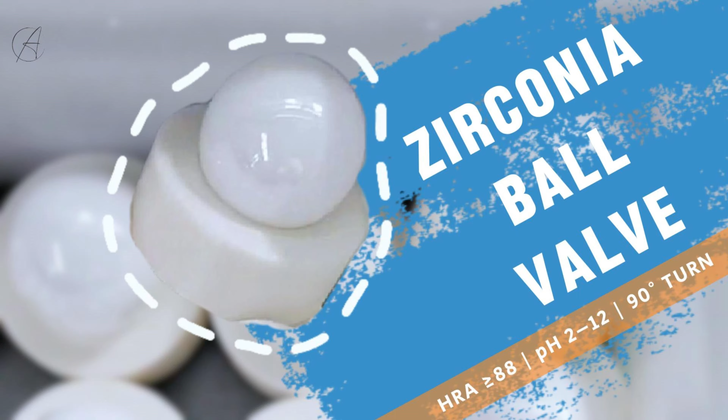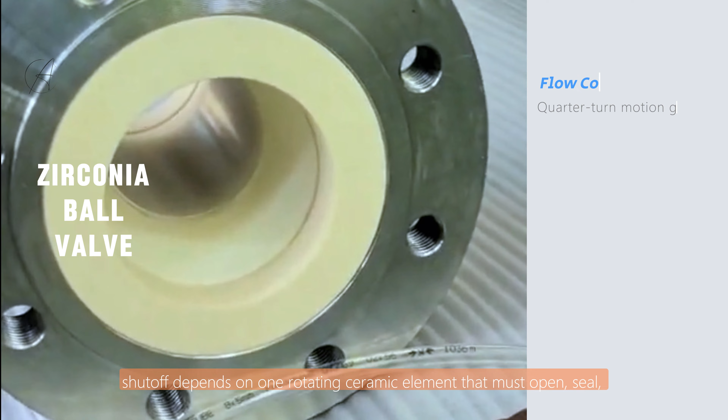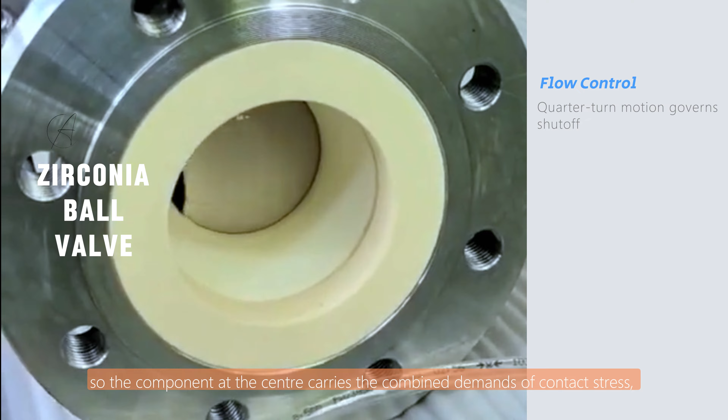Inside a ball valve, shutoff depends on one rotating ceramic element that must open, seal, and reopen without losing geometry. Each quarter turn redirects the flow path, so the component at the center carries the combined demands of contact stress, fluid attack, and repeated motion.

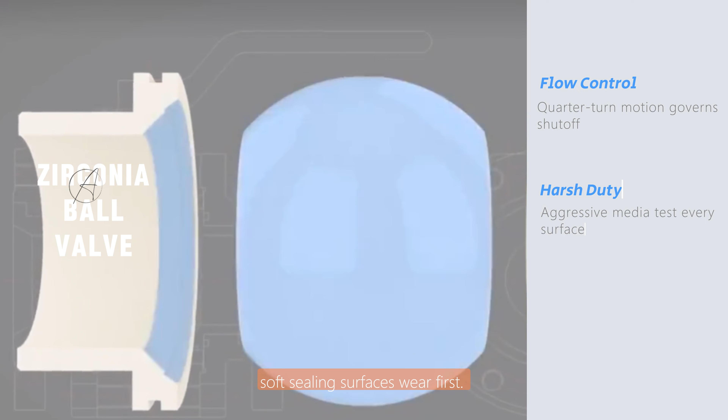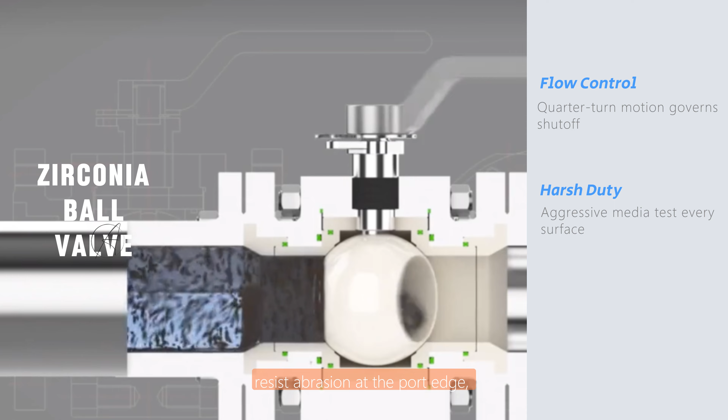When slurries contain hard particles or corrosive species, soft sealing surfaces wear first. The ball and its matching ceramic partners are then asked to do more than block flow. They must keep the passage smooth, resist abrasion at the port edge, and maintain stable contact at the sealing zone.

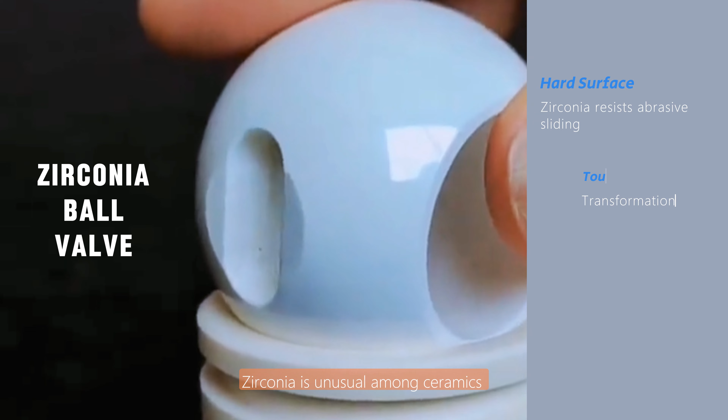Zirconia is unusual among ceramics because stress can trigger a local crystal transformation near a crack tip. That volume change helps shield the crack and raises fracture toughness compared with many oxide ceramics. The result is a material better able to tolerate contact damage and interrupted loading in mechanical sealing parts.

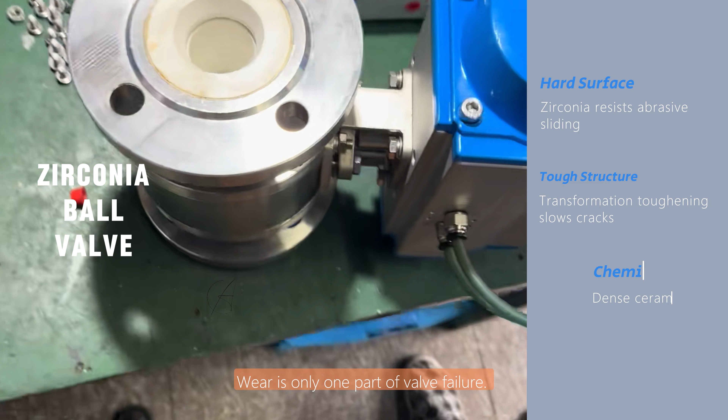Wear is only one part of valve failure. Corrosion, surface reaction, and deposit buildup can also disturb sealing. Dense zirconia offers broad chemical resistance and does not rust, which helps preserve surface integrity in many aqueous and chemically active streams. Medium composition, temperature, and pH still need review because compatibility is always service-specific.

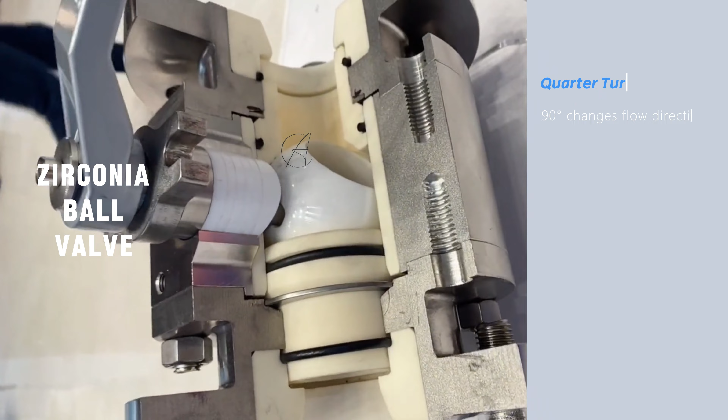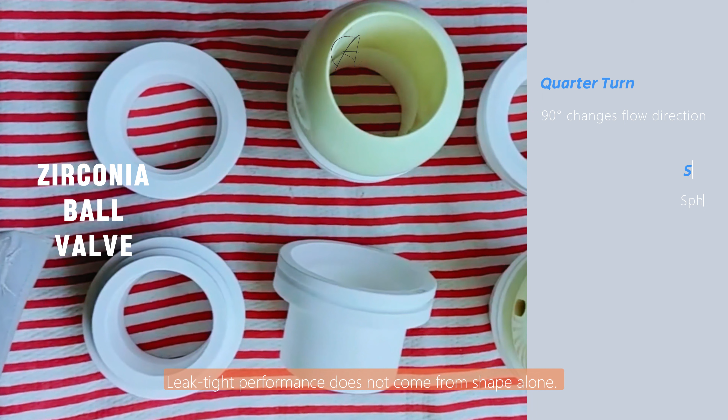The O-port geometry works through quarter-turn motion. At one position, the bore aligns with the pipeline and the valve opens. After a 90-degree rotation, the solid section blocks the passage and shutoff occurs. That simple movement is why ball valves are valued for fast actuation, but it also means the spherical element must stay dimensionally precise. Leak-tight performance does not come from shape alone.

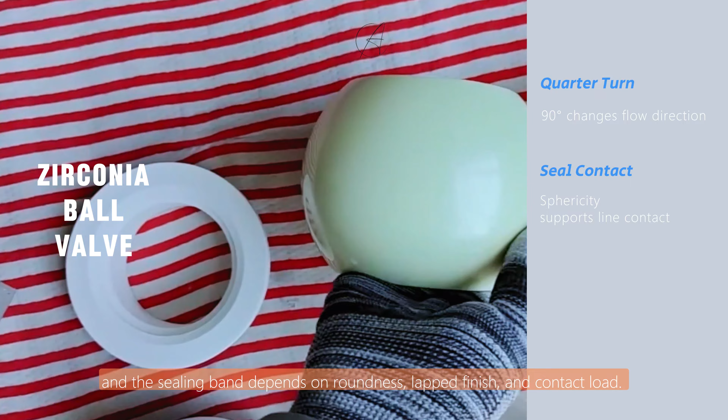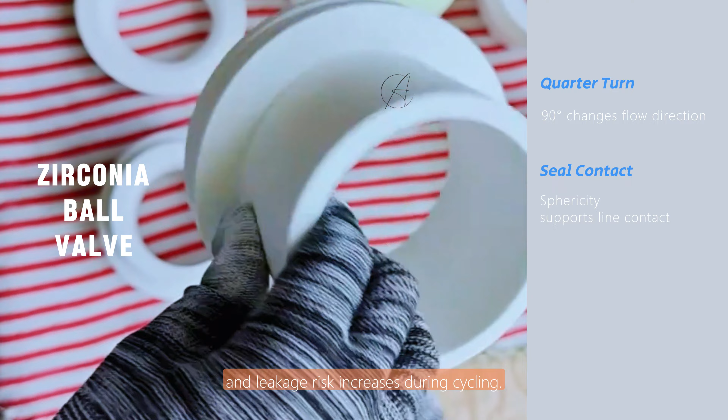The ball, seat, and stem interface must share a controlled geometry, and the sealing band depends on roundness, lapped finish, and contact load. If the sphere wears unevenly, the contact stress redistributes, torque can rise, and leakage risk increases during cycling. Actuation torque is a system response, not a single material constant.

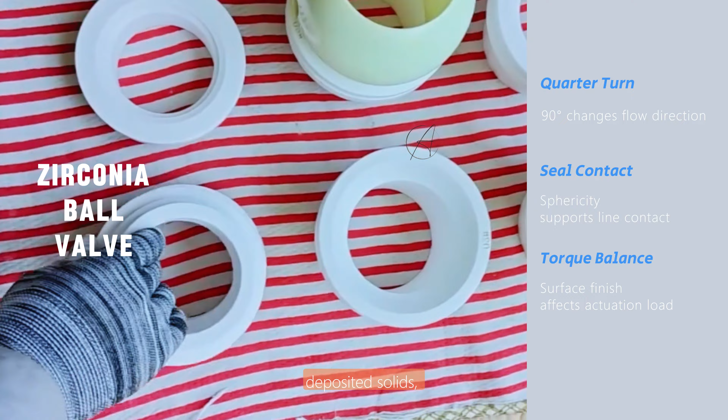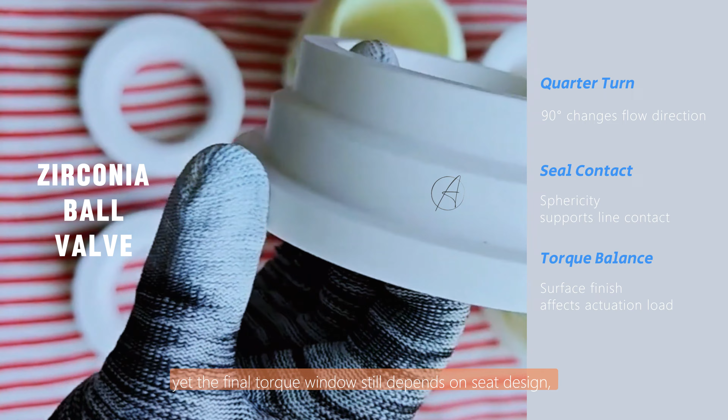Friction at the seat, fluid pressure across the port, deposited solids, and surface roughness all contribute. A hard, smooth ceramic ball helps the valve rotate consistently, yet the final torque window still depends on seat design, lubrication strategy, and operating pressure.

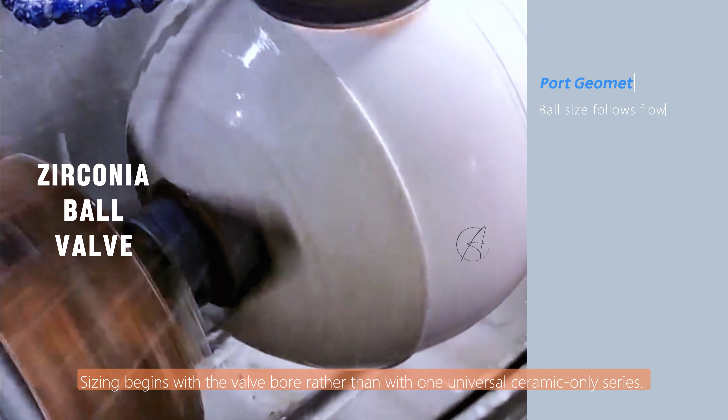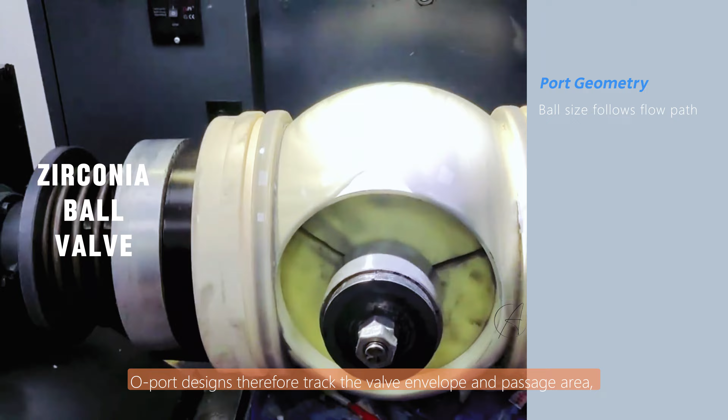Sizing begins with the valve bore rather than with one universal ceramic-only series. The ball diameter, through-port diameter, wall thickness around the port, and stem drive feature must all match the required flow capacity and shutoff class. O-port designs therefore track the valve envelope and passage area, not a standalone bead or bearing size system.

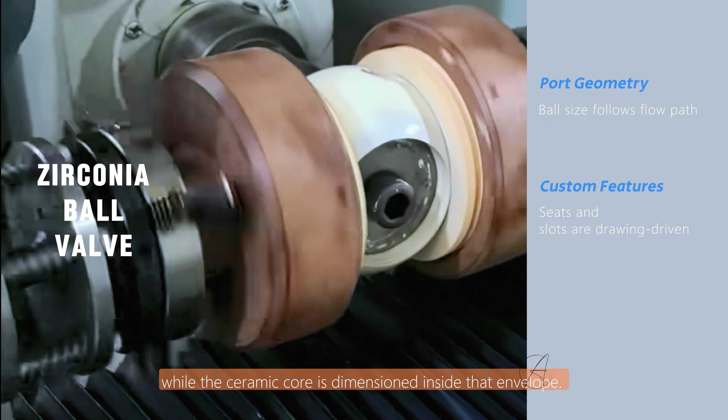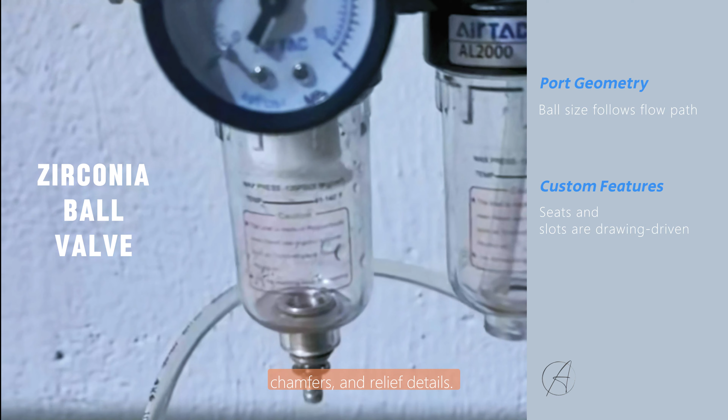Industrial ball valves are usually discussed by nominal valve size, while the ceramic core is dimensioned inside that envelope. Beyond the main diameter, common custom variables include port size, stem slot dimensions, seat matching radius, chamfers, and relief details. The useful dimension is the assembled geometry rather than one isolated number.

In abrasive slurry isolation service, solid particles strike the port edge when the valve moves and then scour the passage during flow. A zirconia ball helps the shutoff element keep its shape under that abrasion, so the closing profile changes more slowly than it would with softer materials. Stable geometry is the first requirement for stable sealing.

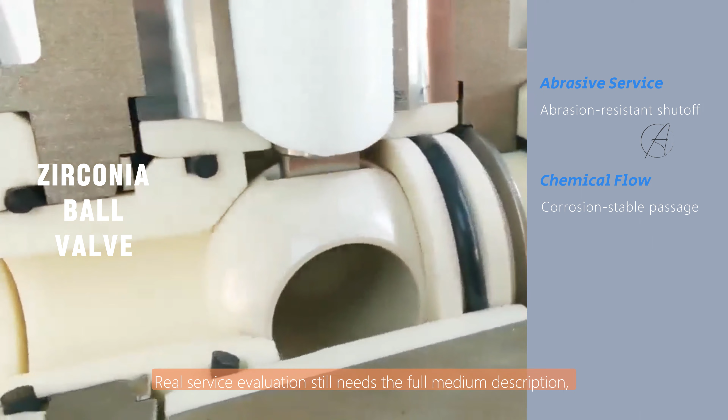Slurry lines often combine solids with chemically active liquids. Here the benefit is not just hardness. The dense ceramic passage resists many corrosive environments and avoids metallic rust products, which helps protect flow cleanliness and seat contact. Real service evaluation still needs the full medium description, especially temperature and concentration.

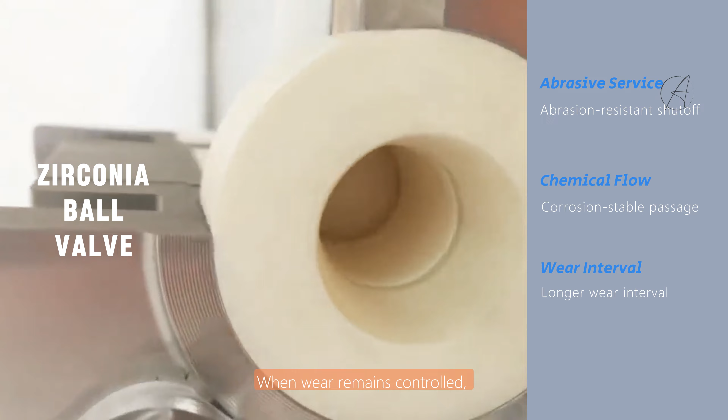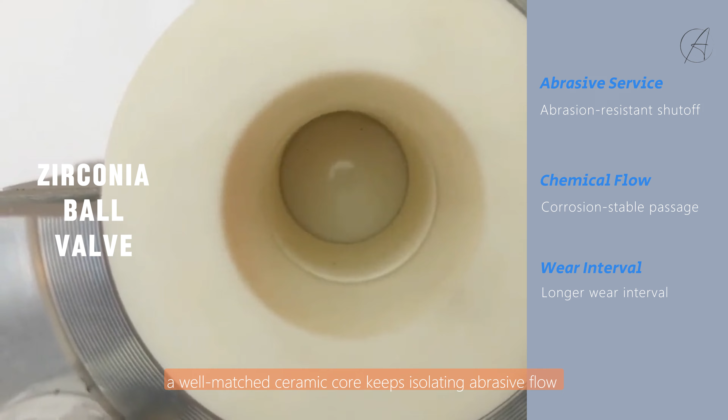Valve components are judged by how quietly they disappear into the process. When wear remains controlled, the passage stays predictable, operating torque stays manageable, and shutdowns for replacement become less frequent. More importantly, a well-matched ceramic core keeps isolating abrasive flow without turning every maintenance cycle into an early surprise.